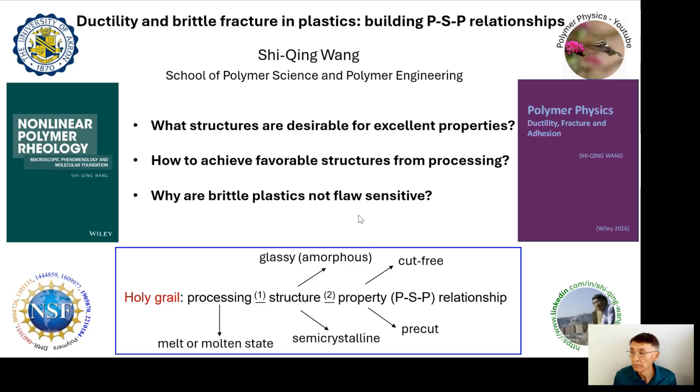So the holy grail is processing structure property relationship, and how do we establish it? This is a picture with three generations of students - the first generation working on rheology, the second generation working on ductility, and the current generation, many already graduated, working on fracture. We were fortunate to be able to do this because of the continued support from the National Science Foundation, and Andy Lovinger just retired recently. We are indebted to him because of his belief in what we do, what we have done, and his support.

So I will start in a rather unconventional way - I will just try to review for you what we already know, whether we understood it, that's the question, right? We already know that there's such a thing as Mylar. If you check the list, it's one of the most wonderful industrial inventions. You know what it's based on? It's based on PET, actually - it's biaxially-oriented PET. Why does it have such properties? Well, if you finish this talk, listening to me, probably you would know why.

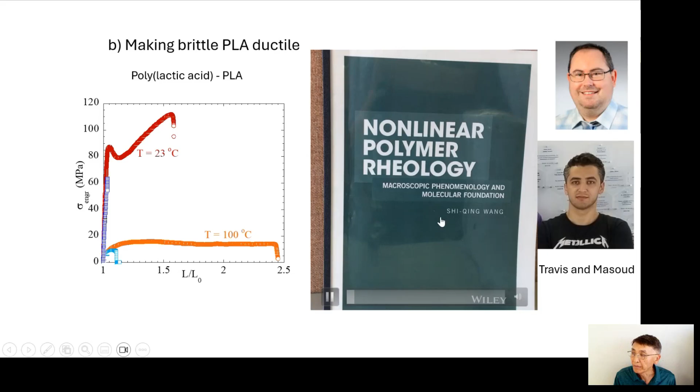Secondly, we are able to show that through a similar piece of physics, the nasty, brittle PLA can be made ductile, and we have made one of the first transparent, heat-resistant, and super tough PLA cups, as shown in this movie. This sample is strong even at 100 degrees.

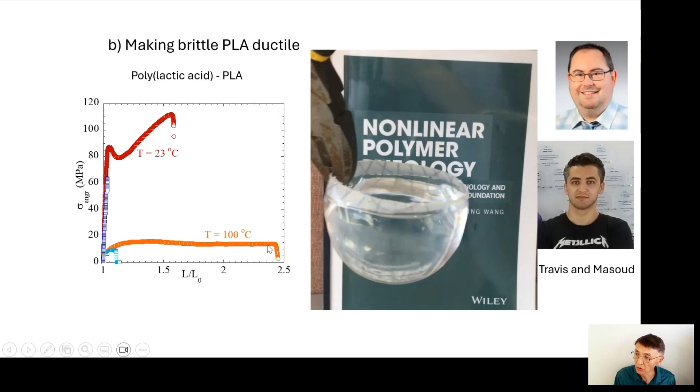So this is something we have previously established. It's also known that the most ductile polymer, such as polyethylene, can be brittle if you have too much crystallization. Why? That's something we think we understood very well now. And PP, polypropylene, is growing in market share, but it's one of the fastest crystallizing materials.

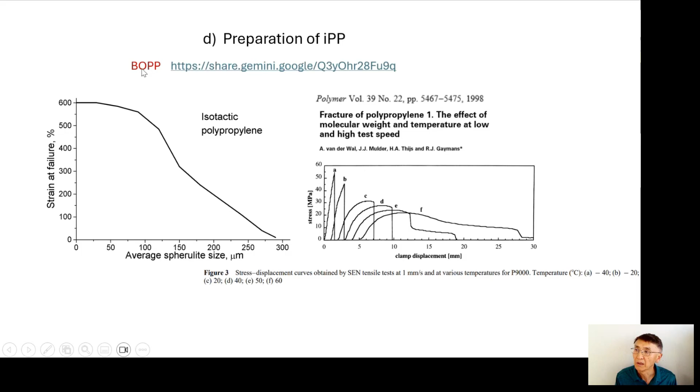Depending on how you control the crystallization, you can get huge morphology differences, and that affects ductility. And when it's brittle, because TG is only -10, when it's below TG, it tends to be brittle. People use biaxial stretching to solve that problem.

Lastly, it is known that even ductile polymers can be brittle in the presence of a so-called notch or crack when the sample is thick enough. So this is just a movie showing, now we know how to show it, that even a ductile, very ductile polymer like polycarbonate, bisphenol A polycarbonate, turns brittle.

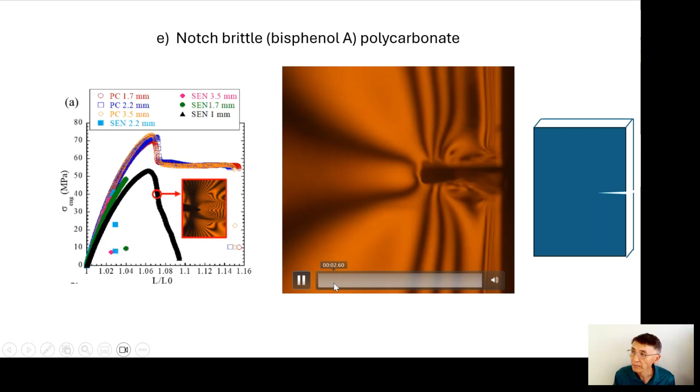So clearly what we need to know is to figure out the relationship. The relationship between structure and property is usually: you know the property, you want to know the structure. That's an inverse problem, infinitely hard to solve, because many structures can produce what you see. But which structure do you see? If you don't know that, you cannot use processing to design and achieve the structure you like.

And to understand processing, you have to know the basic rheological principles. That's the chain we're trying to build up. Over the last 25 years, we've been trying to build this chain: go through the different pieces of the puzzle, learn about rheology, learn about ductility, and start to learn about fracture. The knowledge is in these two books.

AI doesn't know it. I'm sorry to tell you, and I'm proud to tell you, they don't know it. I'm being sarcastic here, heavily.

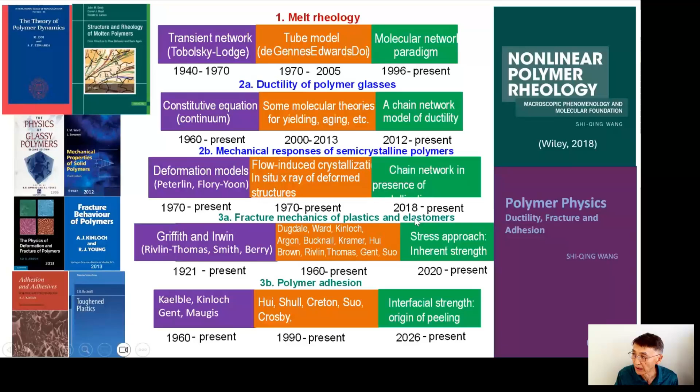In any case, I'm not going to say a great deal about fracture, except near the end. But if I missed anything, you can find it in my YouTube channel. You can find it in the upcoming book. Half of the book is about fracture, because that's the part that was heavily misunderstood about polymer fracture. So I intend to show you this chain of processing and rheology and all that.

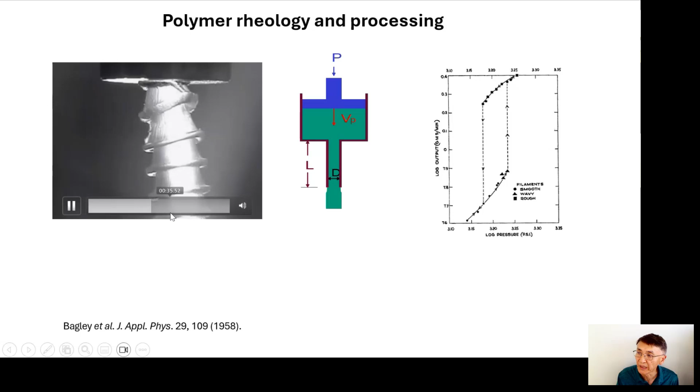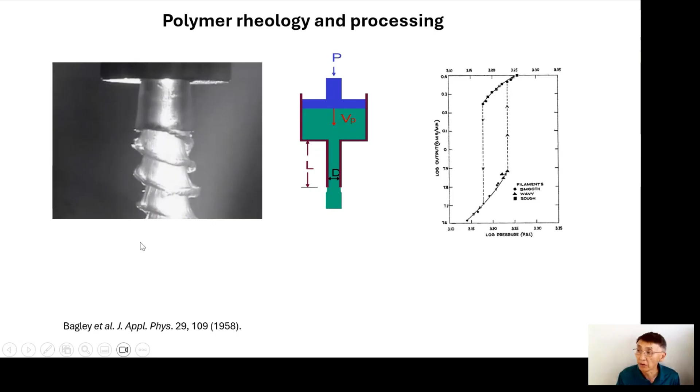Let me very quickly say that rheology can be a nasty problem in processing of polyethylene. For example, you have this kind of melt fracture, so-called. That was the inspiration for us to look into rheology and understand the origin of such things.

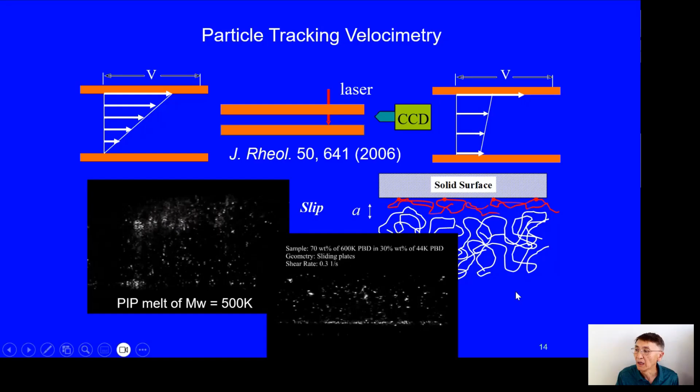It has to do with whether there is wall slip, and this is just some of the illustrations of that type of feature. At the end of the day, we find that we cannot treat molten polymers in processing as a piece of fluid, but rather they behave solid-like. So we need to understand their startup or transient behavior.

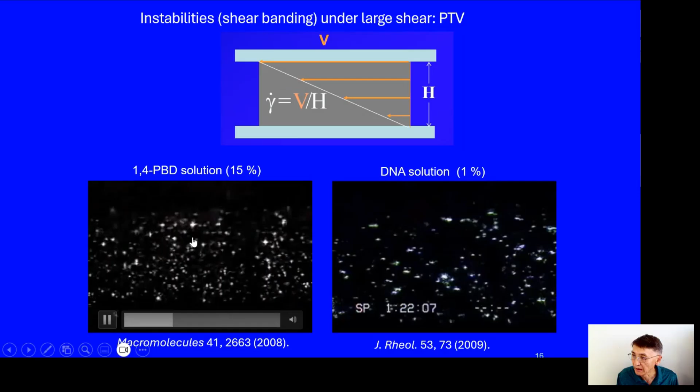This is one of the movies by now close to 20 years old, showing that this innocent flow-like behavior is not so innocent. You see, it breaks as if it was a piece of solid. It's uneven deformation, and this uneven deformation carries all the way through during processing.

For example, this movie was showing extrusion, but when you try to extrude very fast, at the end you find your extrudate is distorted. We know exactly how this occurs by looking at what happens as the polymer rushes to converge into the die at the entry. They suffer this solid-like failure.

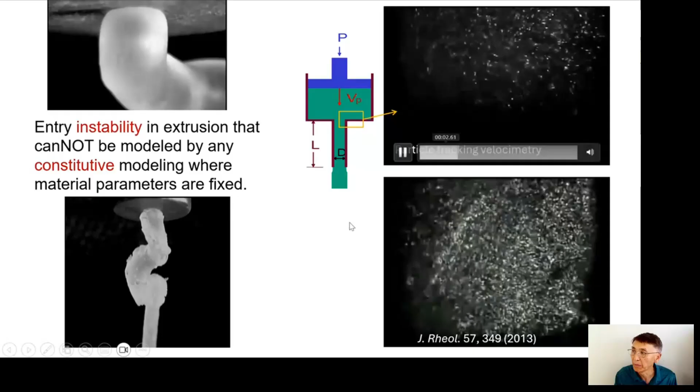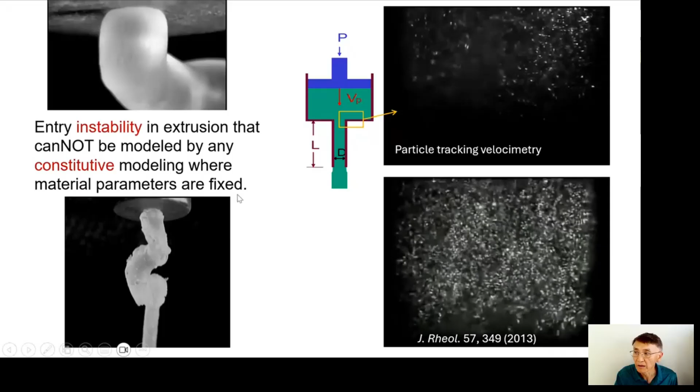This is, again, all published. It's in book 1, but it's very telling. It tells you that you should quit doing your finite element calculations if you are still basing them on constitutive models, because this is an internal structural rearrangement that is not captured in constitutive model.

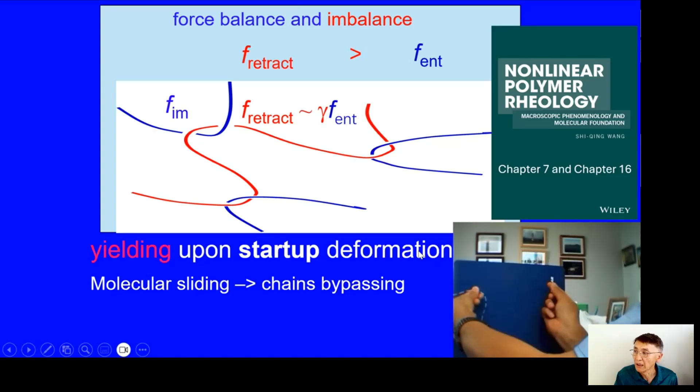In any case, we can even build a basic conceptual level understanding of it. I'm going to skip how I illustrate this, but this is all discussed in the text in my book. My YouTube channel also has a recorded full course based on this book.

But what structure do you have? Well, the structure you have from rheology, we know it's like a ball of spaghetti, and we can characterize how long the chains are, which can affect the viscosity of it, the solid behavior. The degree of so-called entanglement can be defined in different ways. To us, it seems important that entanglement arises from this uncrossability, which is preserved when you go to the glassy state. It's still there, that entanglement, that uncrossability.

So through rheology, we learned also about the solid structure, which is a matter of acknowledging that there is this underlying polymer network.

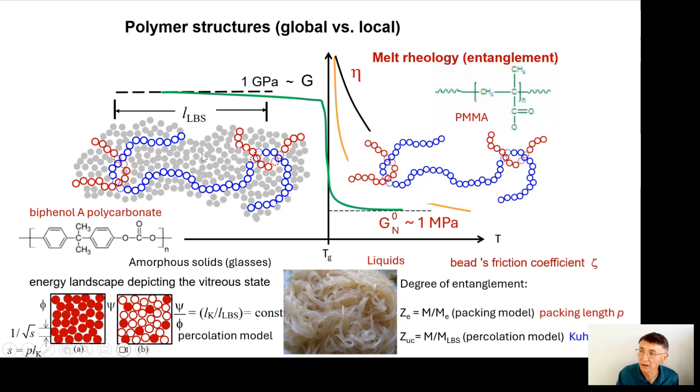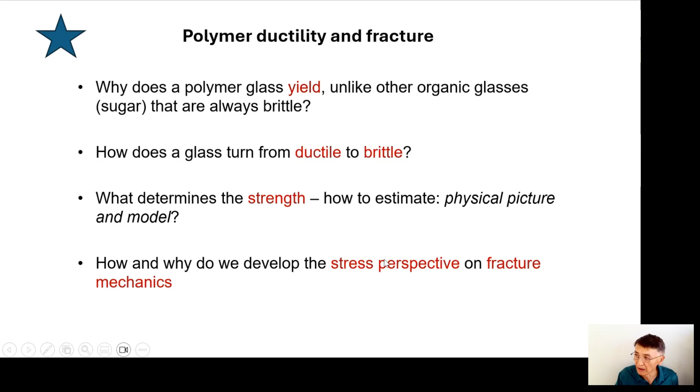And the structure can be universally described. I'm skipping the more details, but come to the question of how come your glassy polymer can be ductile? That's essential, meaning your polymer being ductile is probably the most profound property, the reason we're using polymers. The brittle polymers can be used, but only for certain applications. So we need to understand how to make a polymer ductile, and when it becomes brittle, and eventually learn about a new perspective on fracture mechanics.

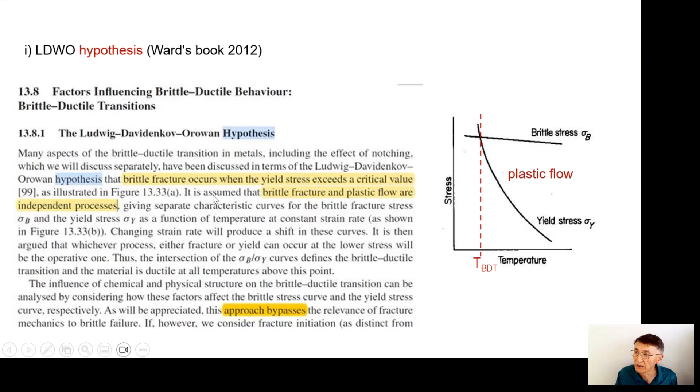There is this hypothesis you can learn about. It basically says lower stress is the winner, and at higher temperature yield stress is lower. The yielding is explained based on this Eyring idea — I see I'm missing a D here — the Eyring idea, and it's generally regarded as the simple way to understand where ductility comes from. But it doesn't tell you in this theory where the stress comes from.

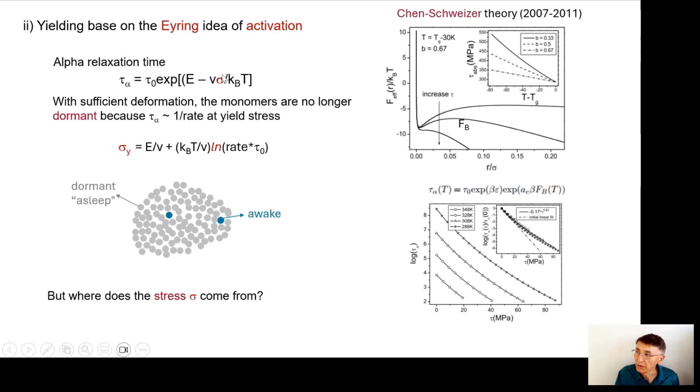Then there's the continuum approach of Eindhoven's group, which treated brittle failure as an extreme form of strain localization. They tried to do this at the continuum level, mathematically showing that features of strain hardening and softening could influence the degree of strain localization. Again, it's at the continuum level — it doesn't go into the details of what happened to the molecules.

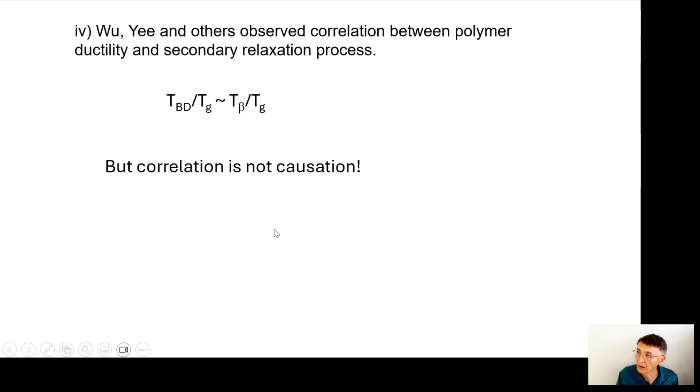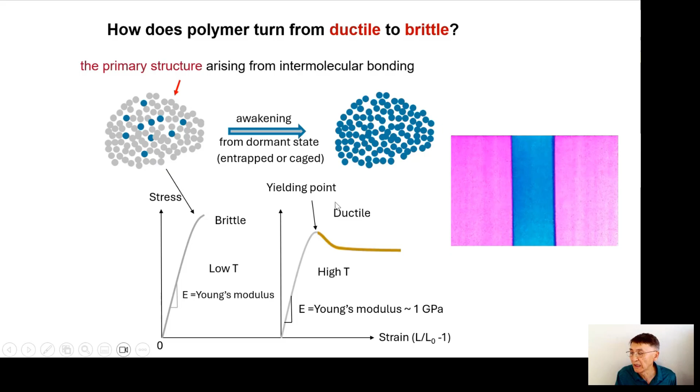And there's a more molecular approach, trying to correlate secondary relaxation with the brittle-ductile transition, but this correlation is not causality. So coming back to why polymer is ductile — it's why the monomers can become activated. That process determines whether ductility occurs or not.

This is some old data showing that polystyrene or PMMA is ductile at high temperature. As you cool it, it turns brittle. For example, at 40 degrees, PMMA is about to change from brittle to ductile. This old paper discovered that if you pressurize your polymer, it can turn from brittle to ductile at room temperature. This was an interesting finding.

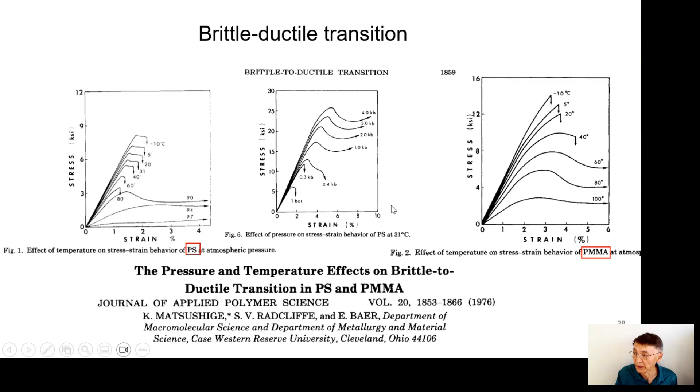Generally, I can summarize that there are many factors that influence the brittle-ductile transition. I just showed you pressurization can change it. Three of these factors change the way packing occurs, and two other factors, which I'm going to review, change how the chain network is changed.

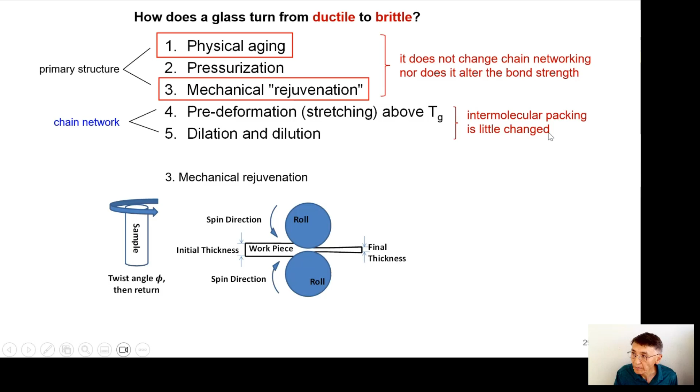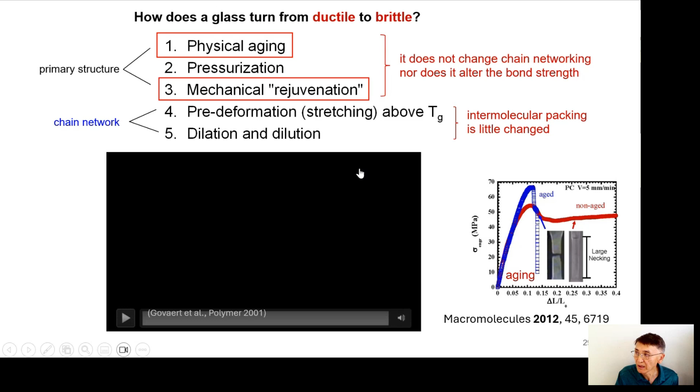One of the most amazing effects is so-called mechanical rejuvenation. This movie from Eindhoven shows how it happens: this brittle polystyrene, after going through a two-roll mill, turns ductile. Beyond that, we know even ductile polycarbonate, upon aging, turns brittle. So these are three factors that influence the brittle-ductile transition.

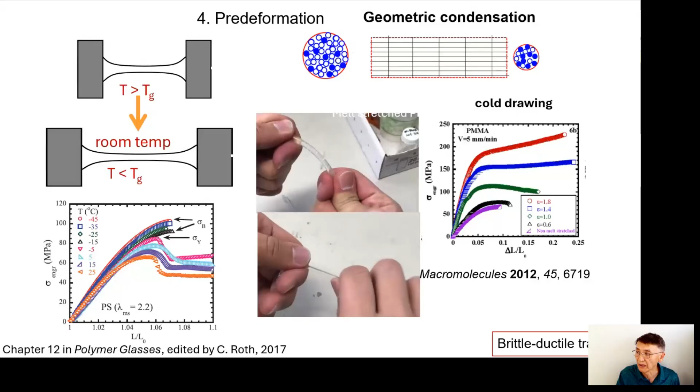It's been known for 60 years now that polystyrene, which is brittle, can be made ductile if you pre-melt stretch it. What I learned is that it produces a different structure through geometrical condensation — the network collapses, becomes more oriented in the transverse direction, and becomes more effective in causing activation. If you then draw it perpendicular to the pre-melt stretching direction, even ductile polymer can turn brittle. I know I'm being brief, but it's all published, so you can find any of this.

I want to emphasize that the reason we need high molecular weight is that without it, the sample is very fragile. One thing to show you: polystyrene that is very brittle, as you can see from bending, is totally ductile in compression.

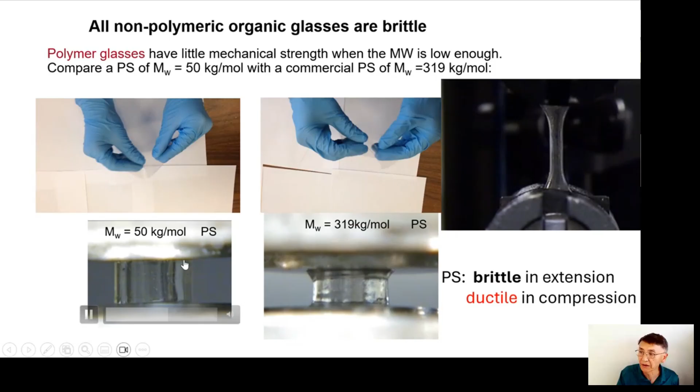I think we understand, among the first, why this occurs — it has to do with pressurization causing the polymer to turn ductile. But molecular weight is still important. If you have a molecular weight of only 50,000 for polystyrene, even compression gives you a brittle response.

In any case, I'm going to quickly show you how we tackled this, how we understood this change from brittle to ductile, taking into account all 5 factors that influence this brittle-ductile transition. At the end of the day, we acknowledge that when you have high molecular weight, the chains have the chance to hook onto each other and form junctions as part of the network.

This unit repeats itself millions of times in a macroscopic sample. When you hold two ends and stretch, the network tries to undergo displacement, moving along and trying to drag along the dormant segments within it. The question is whether you succeed in waking up these dormant segments to participate in the shape change. When you elongate, if volume is conserved, the transverse cross-section must proportionally contract, and that requires the whole sample to have enough mobility.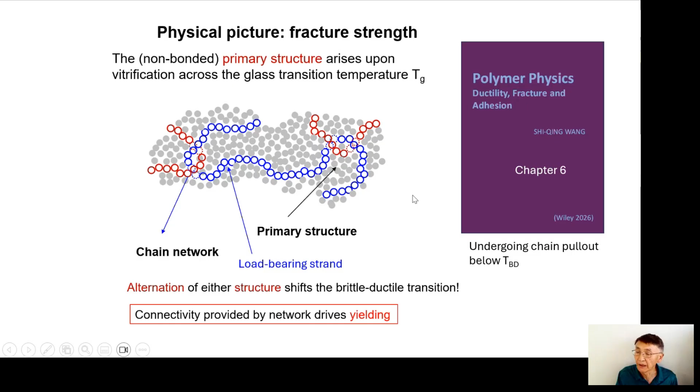So about 12 years ago, I visualized that the role of the chain network is to encourage mobilization through these load-bearing strands. This is described in heavy detail in chapter 6 of the upcoming book, so I'll be brief here — you'll soon see the book. I also have lectures on my YouTube channel about this model.

In some detail, it's logically concluded that the brittle-ductile transition sits at a Goldilocks temperature, below which the network fails to bring about enough mobility and will break down, and above which the network is robust and intact, able to bring about sufficient mobility.

This breakdown is understood as chain pull-out. The blue chain, when you displace your polymer, if temperature is too low, cannot remain hooked with the red chain — they start to pull out. So with this, we have the benefit of this picture showing us how to think about the origin of stress as it relates to the structure of the polymer.

There is a particular theoretical result coming out of this physical picture. With that picture, we now design, or overcome the brittleness of, famous brittle polylactic acid.

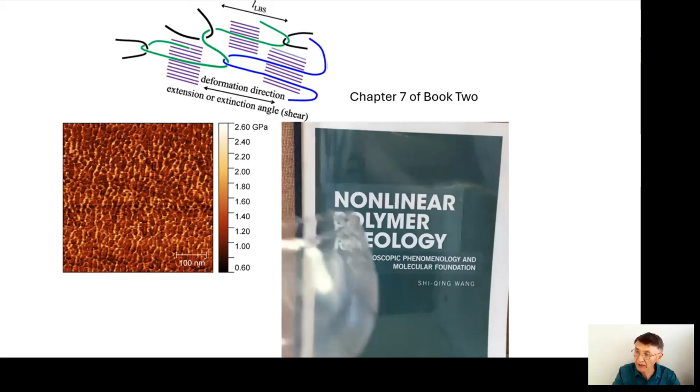What I visualized at the time was that you can do this stretching in the melt state, and when the chains line up, you also encourage crystallization. PET and PLA can both crystallize, but generally very slowly. With enough local chain orientation, though, they can crystallize. I envisioned that this crystallization would occur within each mesh size of the network, so it would necessarily be nanoscopic, making the product transparent. That was the idea.

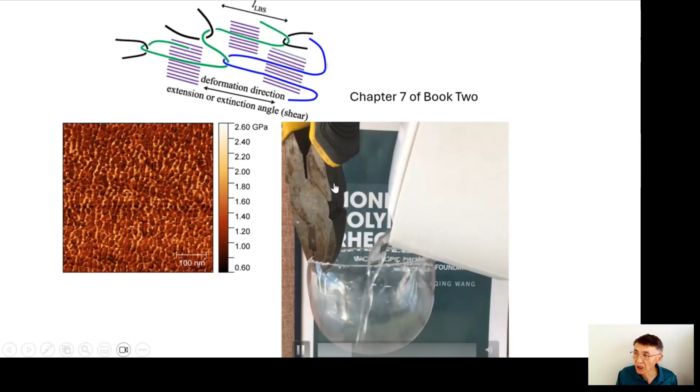It turns out this idea, guided by our understanding of why ductility can be achieved, is the same idea that explains why Mylar works. Mylar was invented in the 50s — I don't think they had the theory at the time, it just magically worked. Now you know why. Mylar is transparent but heat resistant, because you have crystallization that doesn't melt away until 250°C. This is my best example of showing brittle-ductile behavior, the so-called processing-structure-property relationship, PSP.

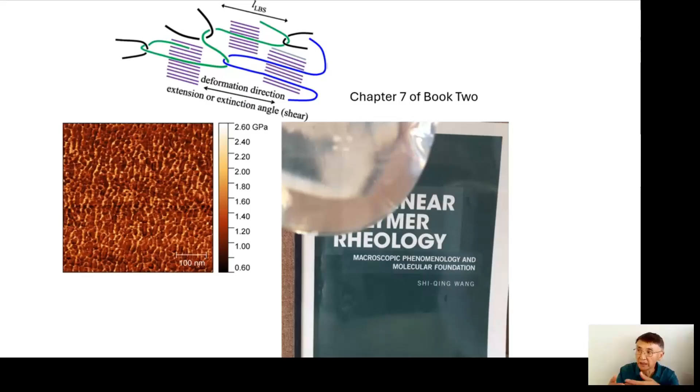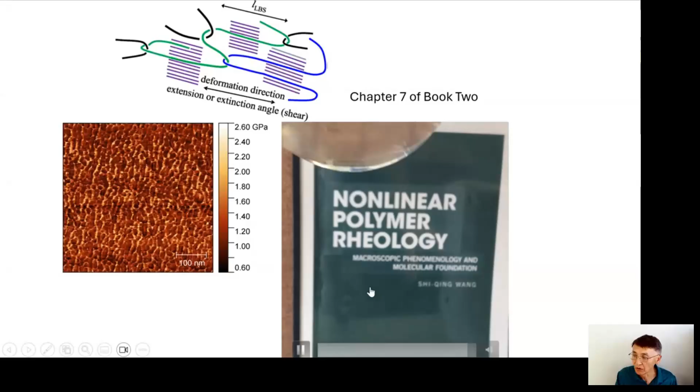We know the structure needs to be such that it can deliver ductility by intensifying the network strength in the XY direction, at the sacrifice of the third direction, the film direction — we don't care about that one. That is achieved through rheology. Once you have that, you can encourage the structure that involves crystallization, giving the double benefit of achieving crystallization without sacrificing transparency, while also achieving ductility. I'm really proud of this way of being guided by theoretical understanding to invent a material, or predict the property of a material in this case.

Again, this is discussed in the book. Chapter 7 covers ductility, or drawability, of semi-crystalline polymers. Chapter 6 covers glassy polymers, meaning amorphous plastics.

Again, if you check with your AI, I think my theory is nowhere to be found. If you just ask, what is the understanding on brittle-ductile transition, the work at Akron probably does not appear in your search.

I sarcastically say I'm proud of that. That really is a disaster that shows you are being misinformed.

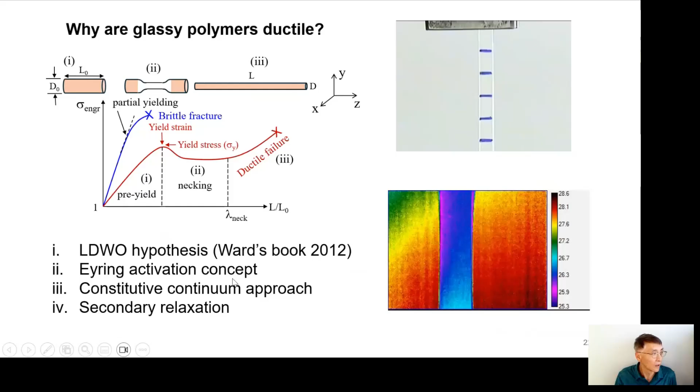It will describe the four things that I described to you. Let's say I have time, so it will describe these four, except my theory. Wonderful, I'm not upset, I'm actually happy, as I told you.

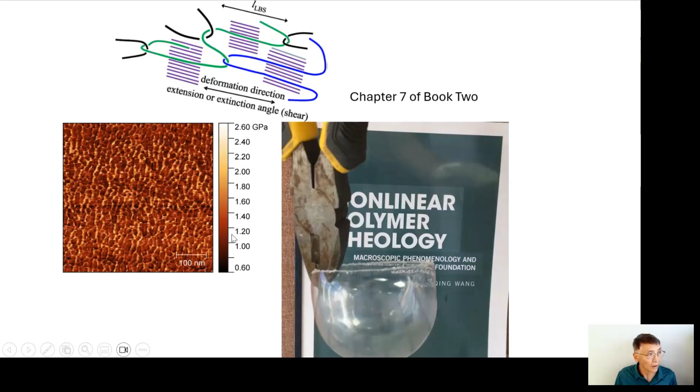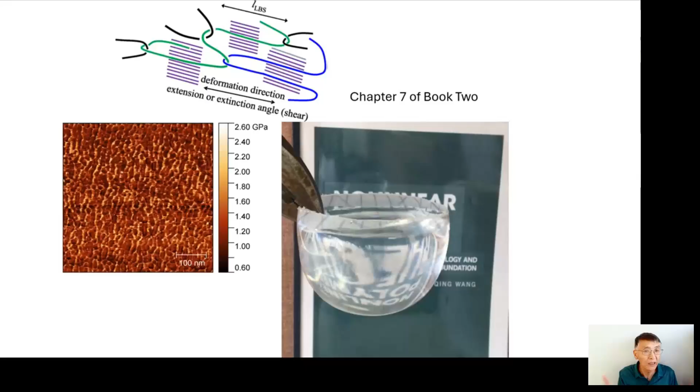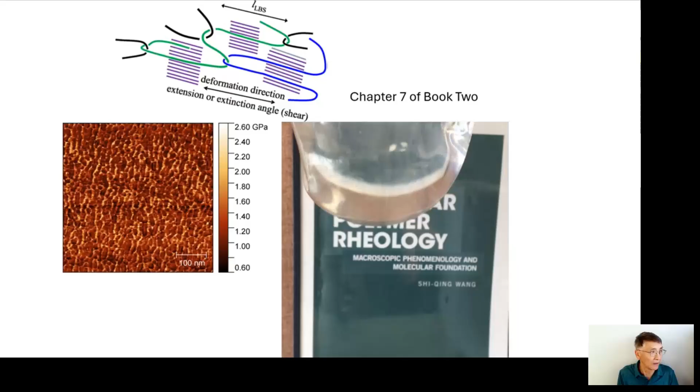So let's do this, folks. We're working on polymers. It's exceedingly complicated. Nobody has any proper theory to handle it. That's why in rheology I wrote this book, because we oversimplify the rheological behavior, how to describe the rheological behavior of polymers, because we have to deal with 10 to the 18 chains at the same time. And no apparatus, mathematical and theory from physics can handle that.

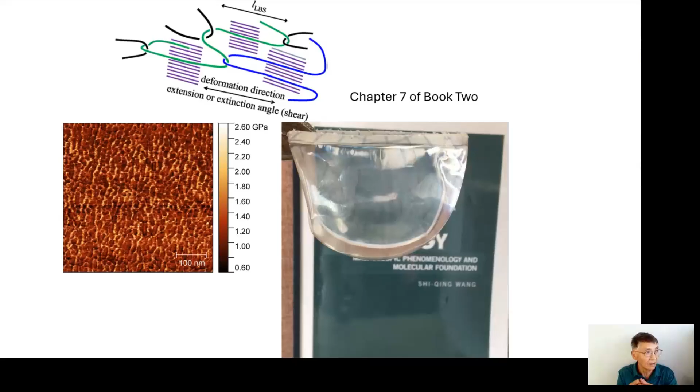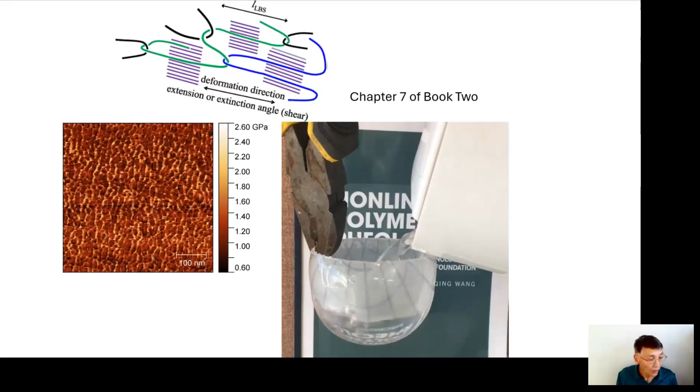So the many-body tube model, for example, just has to throw away all the essential physics and ends up not capturing the conceptual essence of what happens in rheology. Same in the glassy state, same in the solid state. It still involves all these many chains, how they collectively form a network to deliver ductility instead of avoiding this failure of the chain network, that's the point. And we don't easily see a simulation that can be done to prove it.

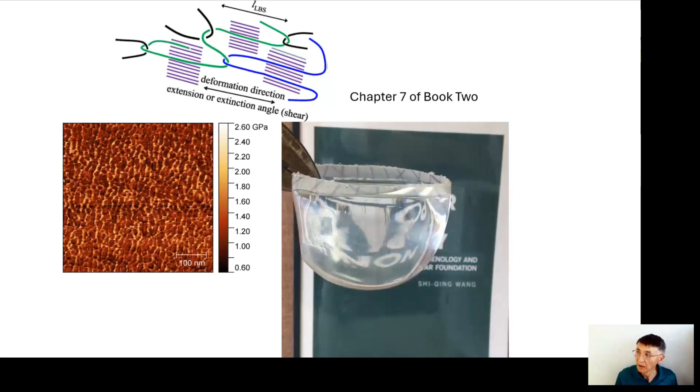We understand it. My theory can accommodate behavior like this. I don't predict per se, I don't claim I can predict, but it accommodates it. Why? Because it can be interpreted as saying that the solvent really has lubricated the junctions where you overcome to achieve pull out. So you can cause the network to become weaker as a result of this lubrication.

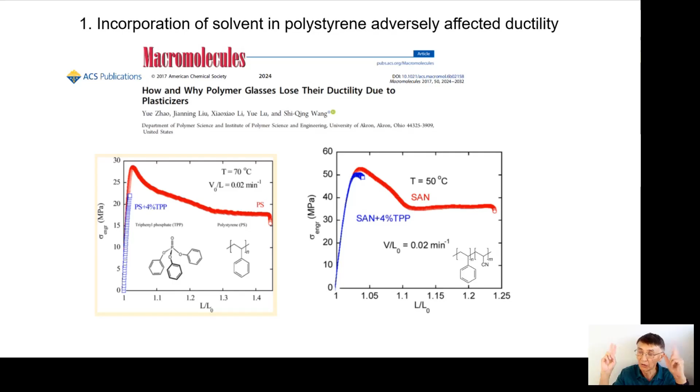There's more crazy things, this again published just now. Usually based on conventional understanding, if you draw your polymer faster, you tend to encounter a brittle response, where you have ductility at the lower rate, and at a higher rate it turns brittle. Now we see the reversal. If you have a certain rate that's ductile, if you lower the rate, it turns brittle.

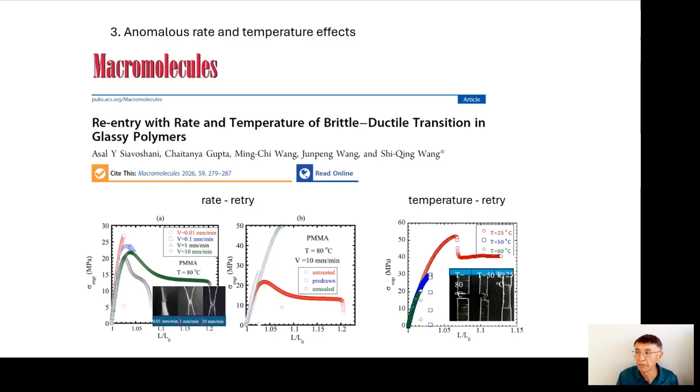Same with temperature. Temperature, usually by definition as I reviewed for you, as you move to higher temperature you tend to achieve ductility, going from brittle to ductile. But we found that if you further increase temperature, this ductile polymer can turn brittle. No conventional classical understanding could rationalize or make sense out of this. But read this paper, it explains why this can happen.

I'm going to probably skip this. Basically, you can introduce anisotropy through squeezing in the melt state and explore this different effect of anisotropic networks. So, for example, when you have anisotropy, when you press a piece of material, the material no longer spreads isotropically, so it becomes elongated.

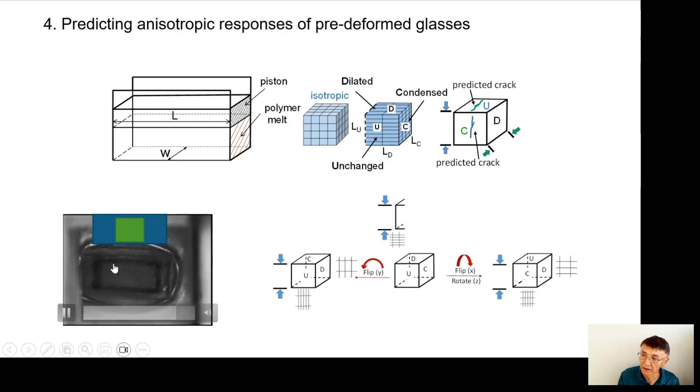In any case, this is my slide about implications. It really summarizes all the known practice that we have today. In particular, I think it takes my theory to properly understand the effect of biaxial stretching. This three product is industrially widely known, the reason they do it is to alter the structure in favor of achieving ductility.

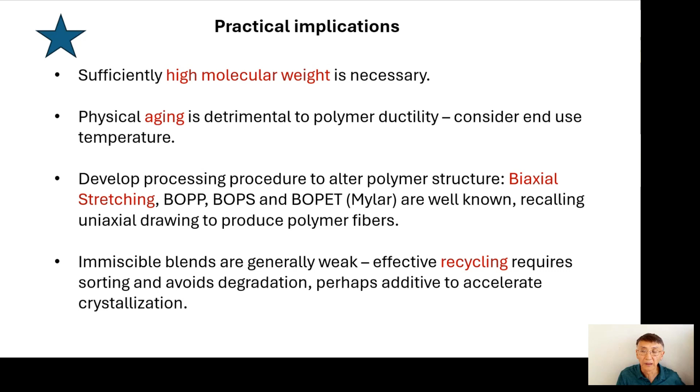And of course, it even explains why typically immiscible blends suffer weakness, because incompatibility disrupts the network. Okay, lastly, let me use the next 10 minutes or less to talk about the part that we are most recently working on.

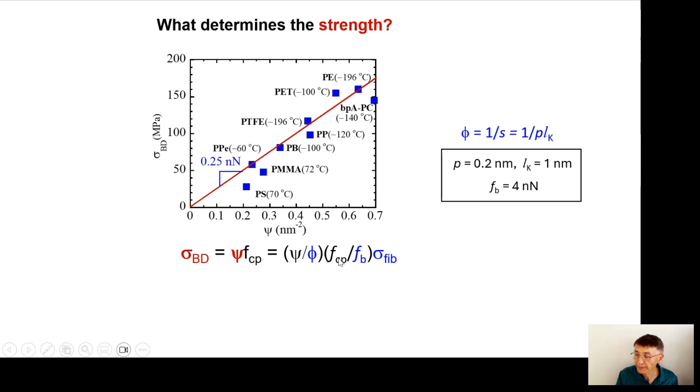And you can express my theory in a way that describes the fiber limit. I mentioned that people are really clever to make polymer fibers. The reason fibers are a clever product is they make all the chains aligned in the load-bearing direction, so that all the chemical covalent bonds are bearing the load. Unless you break the chains, you will not have failure. So at least in that idealized limit, indeed you can achieve strength as high as 20 gigapascals. It's easy to compute and find out. So that's the fiber limit.

But generally, your polymer, the ones we see every day, is generally still in a coil form. They're not in the fiber limit, which means this chain falls back and forth many times, wasting that cross-sectional area without bearing load. They only bear load once. So through that concept, you can understand that basically what we see is a strength that's two orders of magnitude lower than the fiber limit.

Due to what? Due to these two factors. So why is it so weak? Due to these two factors. First of all, it's not in the fiber straightened chain limit. Secondly, the chains pull out instead of breaking. So each of these factors introduces a factor of 10. And that's why what you observe is only a much lower strength, as you see here.

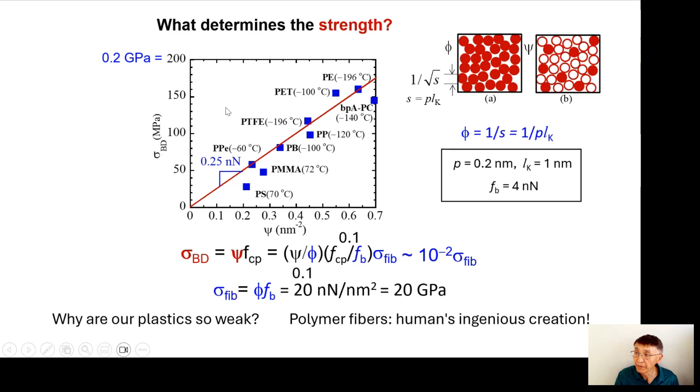This has certain implications. This means, if this is true, what you have is what you have. In other words, the 100 megapascals is all you have. Why is this so weak? Because it's coiled. But that's not how the textbook tells us.

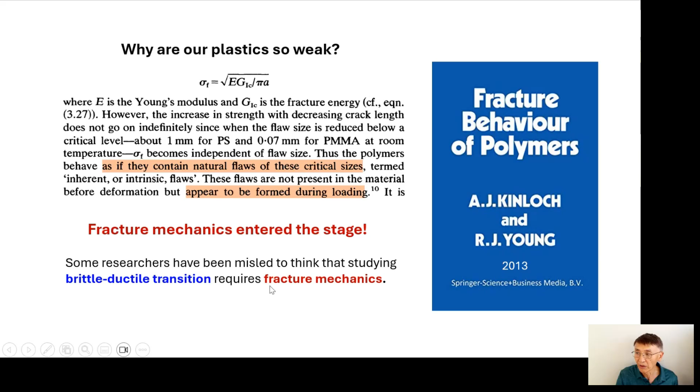If you open the textbook, they will say, oh, it's weaker because there are flaws in the system. This is all over the place talking about that. And there are people who even think that the brittle ductile transition I just explained requires you to use fracture mechanics to explain. That's a total misunderstanding of the situation. So in any case, I don't plan to go through the entire fracture mechanics, although you shouldn't be scared about this topic.

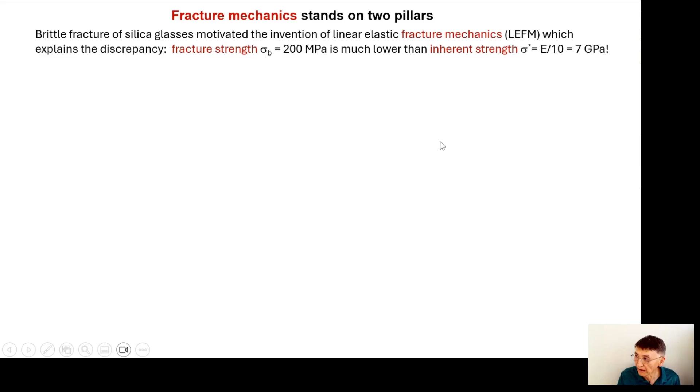Because I have basically clarified the foundations of fracture mechanics in the way I could do through the papers and the talks on YouTube. You can go there, but not for today. Today, I'm just trying to briefly say fracture mechanics is a topic about how the presence of flaws, such as a hole here, lowers the nominal strength that you see. That's the essence of fracture mechanics.

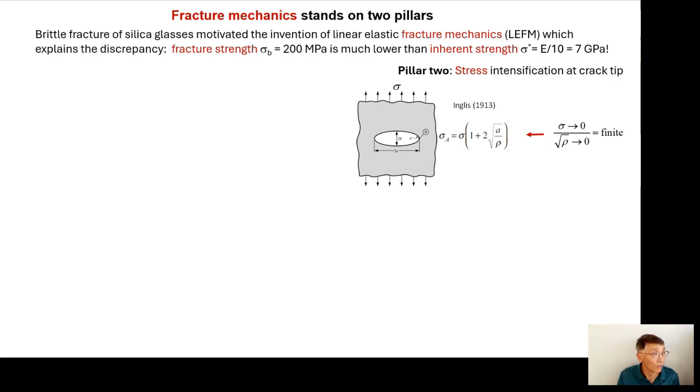And there are different approaches to describing the condition for fracture mechanics. One is known, what I today call the energy perspective. But on the other side, the whole physics of understanding fracture is to understand what happens at the crack tip. And there's some misleading information saying that the crack tip has diverging stress. And this gave us a lot of headache, and people were basically busy trying to remove that headache. My short answer to that question is, for our polymers, the crack tip is often blunted enough that there's no stress singularity to worry about.

And that changes the game, which I don't have time to explain here. But basically, there were two ways to think about it. Today, I call our way of thinking about it different than the so-called energy perspective. This energy perspective of fracture mechanics, as I learned it, is very frustrating because it doesn't tell you what molecular parameters determine the degree to which your polymer resists fracture.

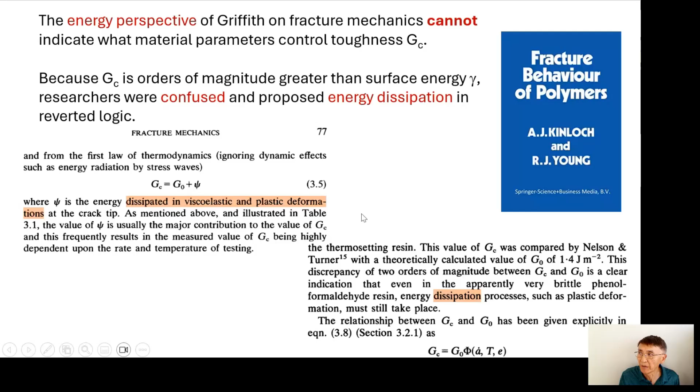And because of the constraint that we are thinking in this energy perspective proposed initially by Griffith, we end up understanding the fracture in a totally different way when it comes to the so-called toughness of the polymer. And they find this toughness is much greater than surface energy. And therefore, this energy perspective forces us to say that this is all about so-called viscoelastic dissipation, which we are developing our understanding to confront.

So here's our perspective, and it comes very naturally from what we have done for the ductility of polymers. We basically want to answer this question: at fracture with a crack, what is the stress at the tip? Because if I know that, I can compare with my nominal strength. And if they are comparable, then I can claim that there's no flaw that plays any role.

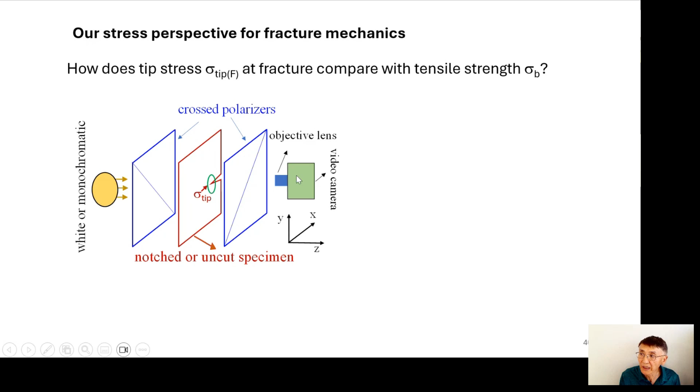So we naively started this way by developing a birefringence technique to look at the tip and see if we can explain why the observed stress is much lower than the fiber limit strength by a factor of 100. Our finding, save some time.

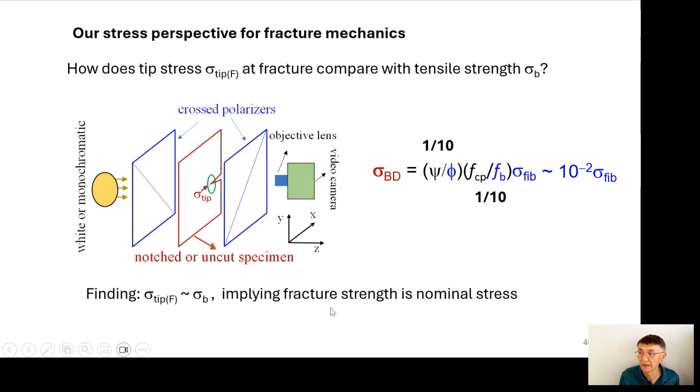They are comparable, implying that your inherent strength is what you observe. You get what you get. And this is some detail showing you exactly that.

So we find that we can resolve the tip stress, we can read the stress, and we find that stress to be comparable with an unnotched PMMA. So that changes the game.

So in any case, we have learned something previously not available. The resistance to fracture previously is characterized in terms of this toughness.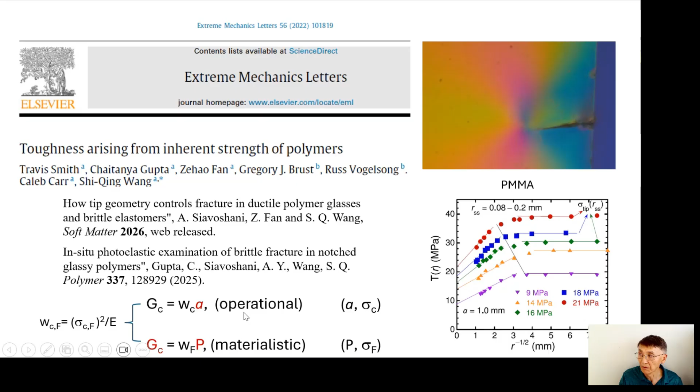And now we can really start to see how we can improve polymer. But ultimately, these are just a few examples of different polymers. It's similar - this is PMMA, this is a PLA. So they all confirm the same thing.

So ultimately, it's all about how to make polymer ductile so you can avoid this, so that the resistance to fracture can be greatly amplified. So I'm quick on this fracture part, but as I advertised to you, there is a collection of talks I have on fracture on my YouTube channel, where you can learn all the details.

Most of them are, in fact all of them here, are from presentations at recent meetings. And so here comes the implications. It's no wonder when you produce your polymers, you don't need a clean room to do it, because the dust particles are typically too small to really lower your strength.

And ultimately, you want to have ductility. That's the only way to improve toughness. In other words, as you improve toughness, you end up moving a brittle polymer into a ductile polymer through the structural change, as I mentioned here.

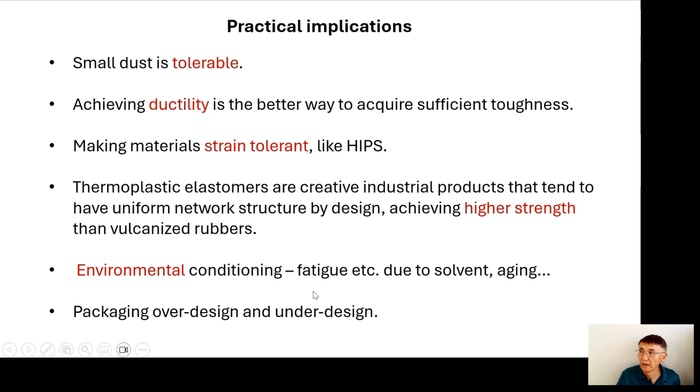So I'm just listing a few points about the implications of our understanding of fracture. And I come back to this chain, and this is how each of the parts is relevant.

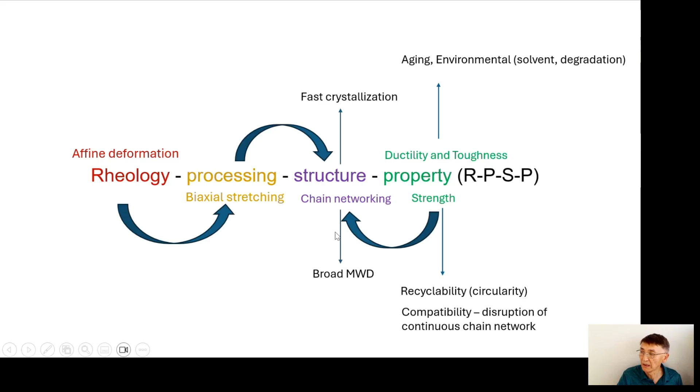About rheology, we learned we need to change structure through fast enough deformation, called affine deformation, so you can preserve the structural change, and that structural change during processing could lead to much better properties. So that's the backward way and forward way of looking at this.

So in summary, these are the three questions. We know how to answer them. You need a high molecular weight. I didn't say too much about crystallization - you need fast crystallization so that you don't disrupt the existing chain network in the molten state.

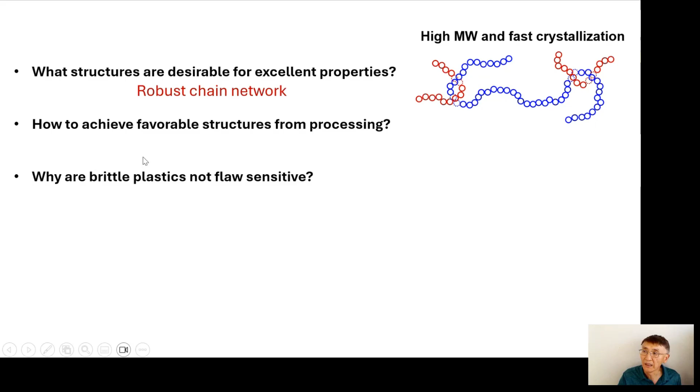And secondly, favorable structures come from fast enough shape change, so you can manipulate the structure effectively. And lastly, what happens is the material has its strength because the chain networking makes cracks very blunt, so it can tolerate a lot of flaws of small sizes.

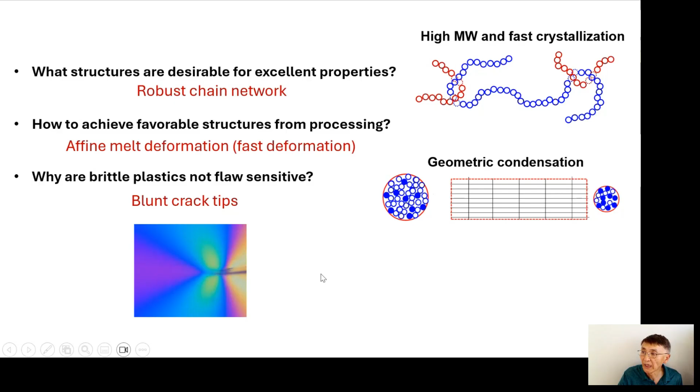So as I said, I have a channel. There are talks on fractures. There are talks on, or in fact, this whole course on rheology, and there are talks on ductility. If I'm too brief, you can find them there. And this is my conclusion section.

You can see, I mean, it's a very brief talk. It's not a very detailed one, but you can see the effort we have here was to, at the conceptual level, establish this full chain from processing to structure to properties. Yeah, so with that, I'm done.

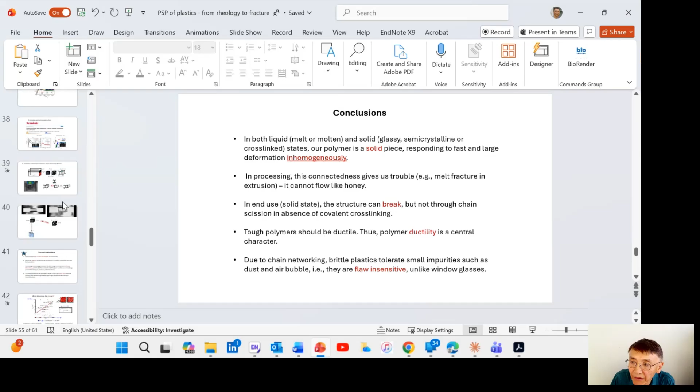Yeah, so that's exactly where it fits in. I did make one comment about the issue of recycling. Let's not kid ourselves, first of all. We do recycling because we haven't found something better than polyethylene and polypropylene that we can make cheaply. That's why we're doing the processing and recycling.

In this recycling, the biggest problem is sorting. I have colleagues working on how you compatibilize the incompatible parts of your collected plastics. If you don't have enough compatibility, you have a phase A that builds a network because it has high enough molecular weight, and a B that does so too, but at the interface, I mean, it's completely trivial for anyone.

Including the folks who asked this question, there's nothing at the interface. If you have a compatibilizer, it naturally will have to be high enough molecular weight that it can reach and entangle, in my language forming loops, uncrossability, to preserve the continuity of the network. In absence of that, you're not going to have good properties. And then, through this processing, you can have degradation, reduced molecular weight, changed crystallization rates. This all affects what you end up having.

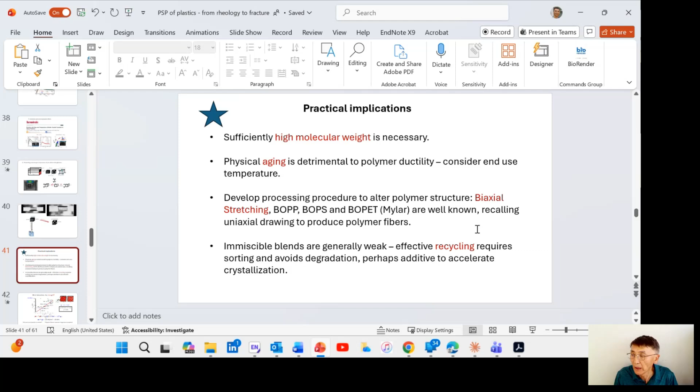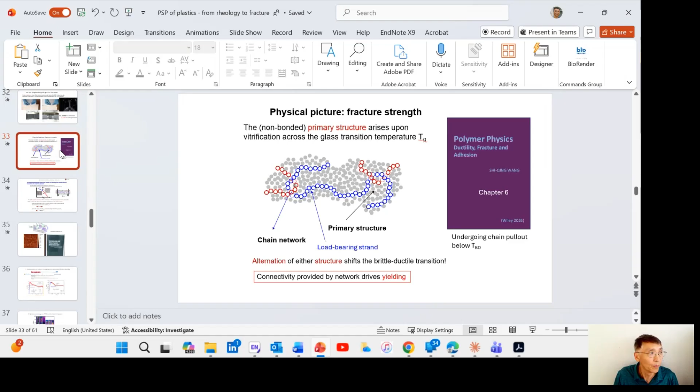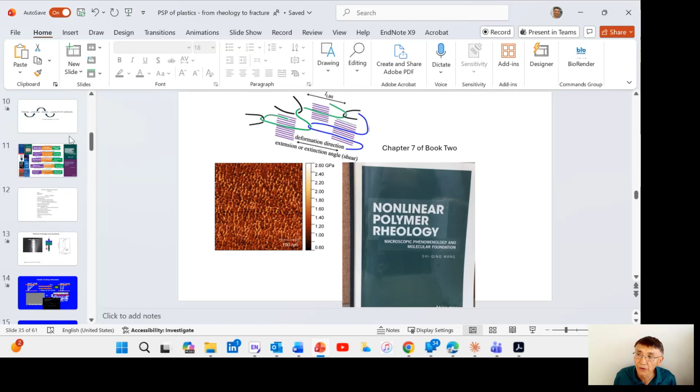As I showed you, your polyethylene, when it's crystallized enough, it's brittle. That's Mandelkern's work. Why? If you give it enough time, which is the bad thing, you want fast crystallization. But if it's slow crystallization, the chains have time to attach into the crystalline phase. In doing so, they completely rearrange the network. The network does not have enough of this uncrossability anymore, because the crystalline phase cannot tolerate it. So fast crystallization is the magic. Polyethylene works, even polypropylene works, because they crystallize sufficiently fast.

So that the network is preserved. Great, thank you. There's another question here that started by thanking you for the presentation, with two questions. For the PLA you mentioned, can we still have the inherent shape memory behavior in it? And the second, broader question: are the mechanisms for higher ductility in plastics at higher strain and high temperatures the same as the mechanisms of higher modulus and strain at break for rubbers when the temperature is sufficiently above TG?

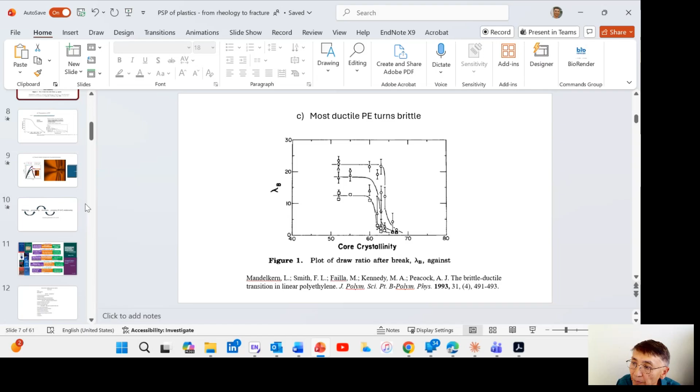It's quite trivial to say the following, and I sometimes tease my student this way. In plastics, all of it, crystalline or amorphous, the so-called yield point of brittle failure just involves a few percent of shape change because it's in a glassy state or crystalline state. Whereas for elastomers, above TG, it can be very stretchable and still undergo so-called brittle failure because the force is still building when it breaks. But that could involve several hundred percent of strain.

When it comes to the effect of temperature on elastomers, since you mentioned it, elastomers are known to be weaker at higher temperatures, so they actually stretch less before rupture occurs. In the case of polymers, as I've spent most of my time on, it's a matter of whether, if you started with a brittle material, increasing temperature allows you to cross the brittle-ductile transition and turns it ductile or not. As you can generally agree, a ductile polymer is typically much more strain tolerant.

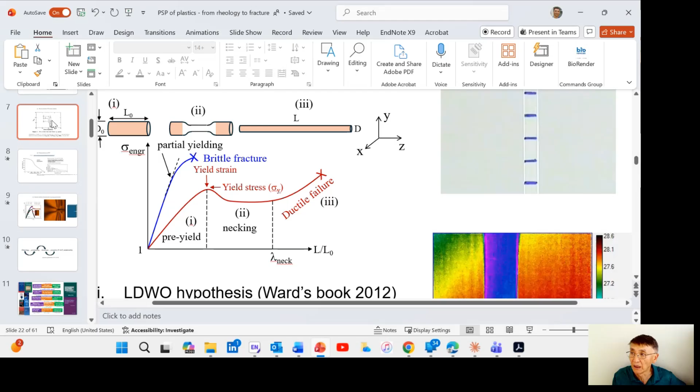Okay, there's a little switch of gears. My talk was on glassy polymers, now we switch to a semi-crystalline polymer. What happens? There are two parts to it. If you have a semi-crystalline polymer, you can speak about so-called drawability or ductility, whichever we wish, either above its TG or below its TG. As I showed you in the beginning, even above TG - this example, polyethylene's TG is very low - you can lose ductility because you disrupted the network.

So now it comes to the essential point, which you may learn better from the two papers I mentioned. A semi-crystalline polymer - you draw it, you lengthen it. By definition, it also needs to develop the ability to contract transversely. Otherwise, you cannot draw it, right? Something will happen - call it cavitation, call it stress whitening, whatever word you have.

And so the key is that you also need a chain network that can properly melt or break down the crystalline phase in conformation with the demanded shape change. So this is the role of the network - it needs to pull chains out of the crystalline phase, make the crystalline phase mechanically melt such that the shape change can take place. So this is the part that, of course, I skipped entirely.